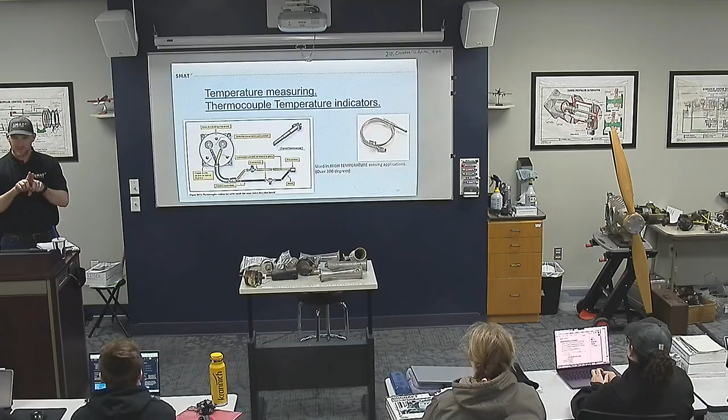Thermocouples. So remember, when we're measuring temperature, there are several different ways to measure temperature on our instruments. One is with a bimetal thermometer, which basically means we have two different metals fused together. One expands at a rate faster than the other and will move an indicator, right? So that's a bimetal thermometer.

A thermocouple has two different types of metal that are fused together at one end of the connection. And if it's a super high temperature, like in turbines, they're going to be super expensive metals, right? So what kind of metals do we use for super high temperatures? Chromel and alumel.

Chrome. Her favorite color is chrome. Anybody know that Trace Adkins song? Yeah, that's a good song.

So chromel's expensive, and alumel. If it's not a super high temperature, then it would be constantan with either iron or copper. So you will have constantan, then iron or copper. So quick review: you don't cut those wires shorter. Now, we've moved up in the world and figured out how to make adjustments and stuff. But when they wrote the FAA textbooks, for the most part, you would never cut the wire shorter.

If you had extra wire, you'd just spool it up and secure it, because that wire that's coming back is usually going to be copper or constantan. The resistance of them is very, very important. We're not making much voltage. We're talking millivolts. So if we're only making millivolts and then we send it through wires, if we change the resistance of that wire at all, the indication for how much voltage is actually reaching the gauge

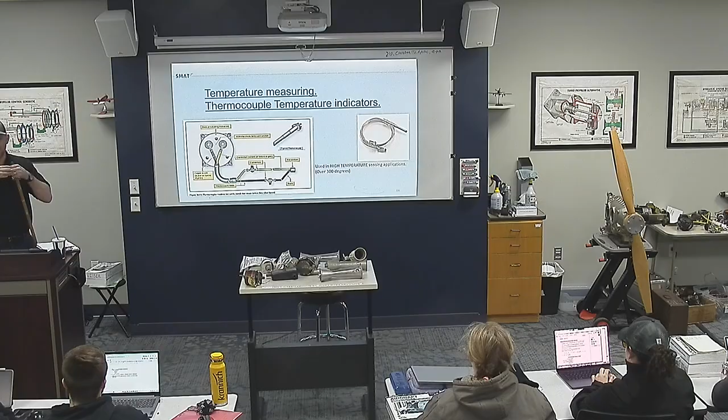The reason it's a crazy heavy duty connection is to make sure that there's basically 0 ohms resistance there, right? If you just had a stake-on connection or a Molex, how many ohms of resistance are there? Well, maybe 3 milliohms. With thermocouples, we want pretty much no resistance, so we'll bolt the wires together to make sure there's no resistance there.

You catch that flash too? Yeah. Weird.

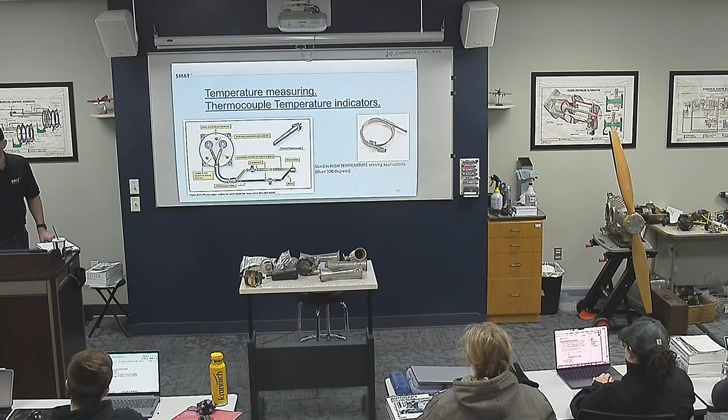All right. So that's thermocouples. Just wanted to touch on them a little bit. We'll get into them deeper in power plant. When we get to turbine engines, we'll talk about how we can put a bunch of them in parallel. We covered this Monday, but quick review: they're going to average that voltage. It'll often go through that amplifier before it goes to your gauge.

But we'll deal with that much more in power plant. But there might be a question on the exam about cutting the wire going through the thermocouple. Don't do it, right? Questions, comments? Is that basically making sense for everybody? Okay.

Okay, got that taken care of. My son, and I actually corrected this slide because he's doing a lot better about it, but when you gave him a job, he was getting really good at not quite finishing. Have you all heard the statement, practice makes perfect? Somebody tweaked it for me: practice makes permanent. Because if you practice something wrong, like when I was in basketball, I always used to shoot from over here, and I practiced a lot. It didn't make me perfect, but now I have a really hard time shooting up here like you're supposed to. I still shoot from my ear. So practice makes

There is a proverb that says, even a child is known by his actions, whether his conduct is good and right. Even a child is known by it. So you guys are building yourselves a reputation. Make sure you're building a good one.

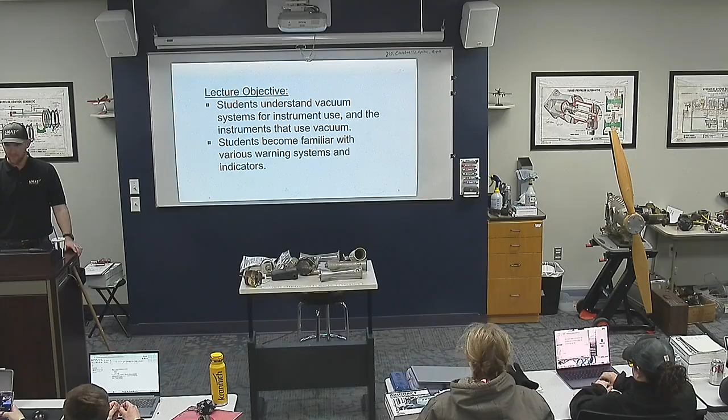All right, we're going to do a little bit with vacuum systems today, and that's where the Venturis come in. And then we're going to shift over to warning systems for instruments. I could do this one for a month, warning systems. It's so fun. Basically, when you go up into a new aircraft that you're flying, probably 30% of what you're learning is the new warning systems, how to read them and how to react when they go off. So we're going to cover it in half a lecture today. Way more info there, but we're just going to cover a couple of them so you're vaguely familiar with them.

Oh, yeah. I gotta find a new seat. Vacuum, you might have to.

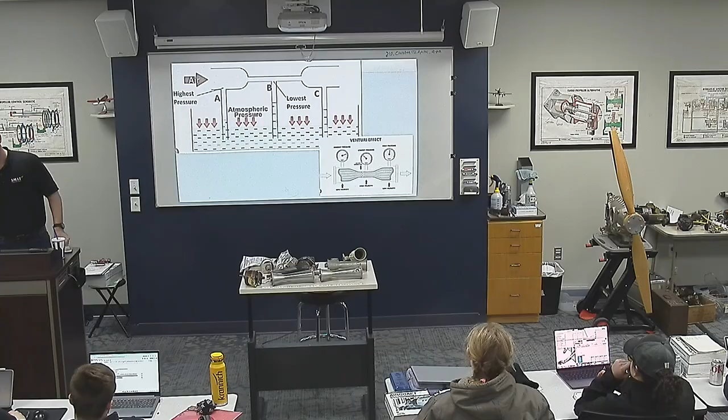So they basically said, you know what, we'll just use the cockpit of the aircraft as our environment, as our high pressure. So the cockpit of the aircraft is our high pressure, it's our environment. It's pretty much the same as static, right? In a perfect world it's a little bit lower, but they're saying the cockpit of the aircraft is the high pressure, so the air is going to get pushed from the cockpit, through a filter, through an instrument, back out into the lowest pressure point, so the air gets sucked into the Venturi, out into the airstream of the airplane.

Randall's asking, I'm just wondering, in some cases, is the static port just used for the environment? No, because our static port, what's the definition of static? We don't have air moving. If we started introducing moving air and changing pressures, our altimeters are not going to like that at all. So we're going to keep our vacuum system separate from our static system.

Actually, a great question, because I just tweaked your exam, trying to confuse you with a very similar one. I took a part that was confusing and made it totally false for people that aren't paying attention in class on Monday. So great question, Randall. Did I see a hand over here? Yeah, I was just making sure. What did you tweak? Which one? Just trying to cover the base there.

All right, so back to Bernoulli's principle: the air has to accelerate to get through the Venturi. If you want to go really deep, what we did is we changed the pressure, the PSIA, into kinetic energy as it is accelerated, because now it has inertia. It's moving faster. Once it slows back down on the backside here, we reconvert that kinetic energy back into potential energy, which is pressure. So we go from a lower pressure back up to a higher pressure after we slow the air back down. That's instrument class 200, but I'm supposed to teach at the 100 level. But that's why we have the lowest pressure there: the air's been accelerated.

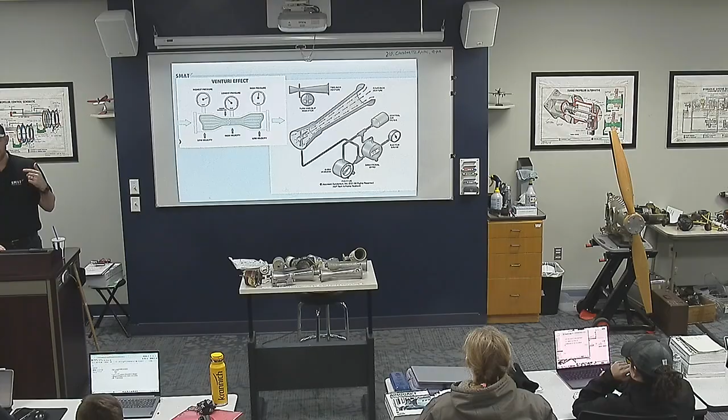All right, so inside our gyros, sorry, not gyros, inside our Venturis, and I'm going to pass a few of these around, one for you. I could've just grabbed all three, I guess. Venturi inside a Venturi. We like to double layer these. They're pretty cool that way.

Some of the images aren't the greatest, but you've got one Venturi, which is the big one on the outside, and you'd say, hey, this is the tightest point of it, right? But what they often do is they put a secondary, oh, I hope I didn't use that word wrong. It's in a slide or two. Yes, secondary Venturi. Secondary is the proper term. The secondary Venturi is that guy right there that is on the inside of it. The tail of it is typically pretty close to the tightest part of the primary Venturi.

So basically what you're doing is you're saying, hey, here's my primary Venturi and this is the lowest pressure, I'm going to give myself another Venturi. If we said, well, what's the lowest pressure in this Venturi? You go, well, we know it's lowest in the neck of it compared to the other pressures. And they're kind of assuming the inlet and the outlet are the same pressure, because that's what people do when they design these things. They are saying this part is the lowest point in our whole system. So that's where the air gets discharged, into the smallest area of the secondary Venturi, right?

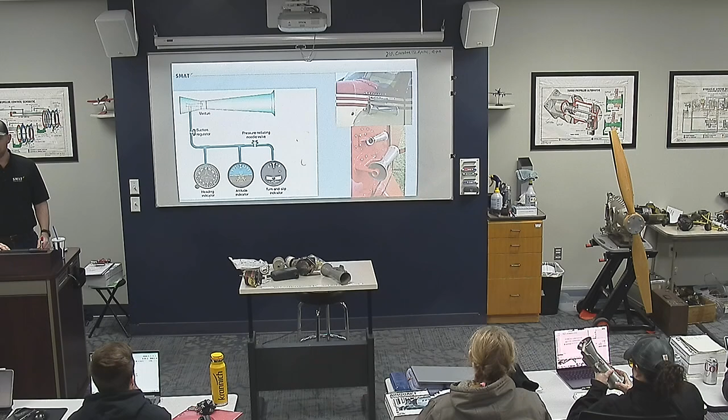So what that does for us is it's kind of like a Venturi inside a Venturi. It works pretty cool. Gives us a good low pressure. They make these things in various different sizes. What's kind of interesting, mathematically, is if you have a 2-inch diameter Venturi, is that what these are? These might be hard to tell. I think that's a 4-inch. They make them smaller, a little 2-inch one. A 2-inch one will typically give you 2 inches of mercury vacuum at flight speed, which is kind of cool.

So some of our instruments, like our turn and slip indicator, only need 2 inches. It's only a one hinge, if you will, gyro. They don't use much pressure. So you can run the old turn and slips off 2 inches with a small one. Some of our bigger gyros, picture our attitude indicators, especially old ones, are bigger, move more ways, and take more suction to run. Both the attitude indicator and heading indicator are bigger, heavier duty gyros. Those are going to require typically 4 inches or so.

So if you make a 4-inch Venturi, you get about 4 inches of suction. That's kind of cool. It starts to break down after that. A 6-inch one, I think you get about 6, but an 8-inch one, you get about 6. You just get a higher volume. Plus, at 100 miles an hour, that's a lot of drag. So on the one hand, you're going, I got free pressure difference, and I'm like, that is not free. That's a lot of drag on the aircraft, especially at high speed, which is why we eventually go away from them. But most of them only have one tube, like we talked about. We want the lowest pressure possible.

You can stumble across some of them that have 2 connections to hook them up. I almost want to say where the pipes are, but I don't want to lie to you. One goes into the Venturi, and the other one is just grabbing the ram air. Not that one. So, for what it's worth, what's weird is they give us this picture in the FAA textbook. I've got one Venturi creating probably 4 or 5 inches of vacuum, so it'll run these without a problem. And basically, they've got a needle valve. Notice it doesn't say a regulator or a relief valve.

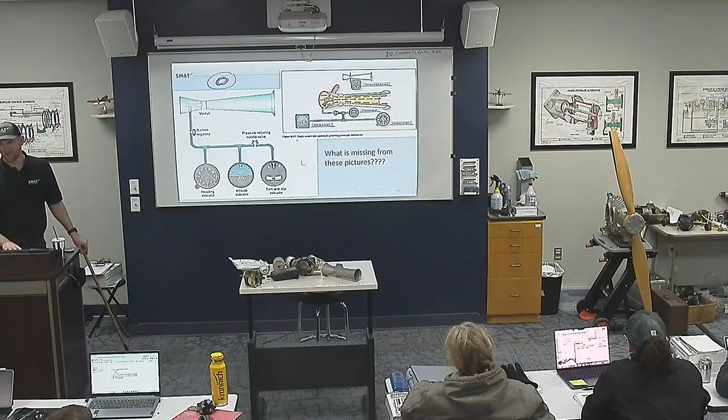Thank you, Amanda. Were you gonna say filtered? I could tell. She was filtering her answer. She's like, I should raise my hand. But I didn't ask for a hand raise, so good job.

Yeah, filter. Any of these are gonna have a filter. So if we were gonna draw a filter in, it looks like that, and then we're gonna come to each of them from our filter. Everybody following? We wouldn't wanna suck dirty air into our instruments. Small picture, bunch of different style filters.

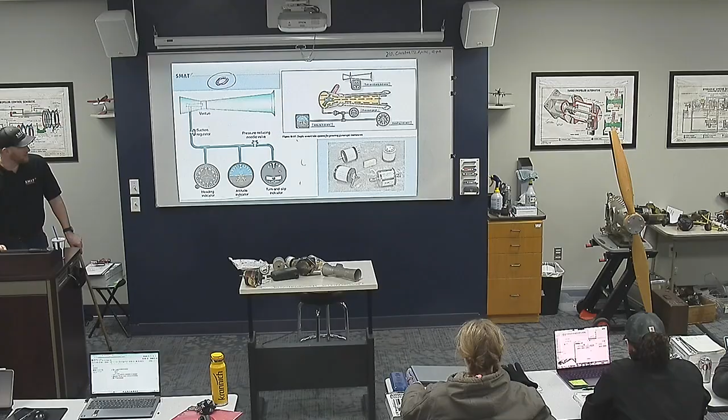Is it Grandpa that doesn't have a filter? I think it's Grandpa. So it has the bottom plate that a filter would get bolted on, but the filter is missing. So if you're following hoses in the 172, you're gonna eventually get to a bracket like this with a fitting, but the filter itself is not on there.

Any filter is gonna have a way to usually replace it. A lot of times if we're filtering air, you're not gonna clean it out. Sometimes you can clean it, but especially with engine air filters, they put a bunch of oil on there so the dirt particles stick to it, and then it's almost impossible to clean. So the 172 just has a thing like this hanging down with a hose off it. The filter is gone, but super easy to replace. Whether it's an annual item or an as-needed item, they're pretty easy to replace. So we're not gonna talk a whole lot about filters. Dirt comes in one side and doesn't go out the other.

Okay. There's a complete picture with an air filter. That one kind of looks like my engine air filter, but it's not. Different air filter.

Alright, if we had a vacuum pump, we got rid of our Venturi. Only crazy people would fly with a Venturi, right? We're leaving Venturis behind because we want our gyros to work while we're sitting on the taxiway, getting ready to take off through the clouds. So now we have a vacuum pump. Some of the early vacuum pumps were lubricated with oil. We talked about that when we talked about pumps.

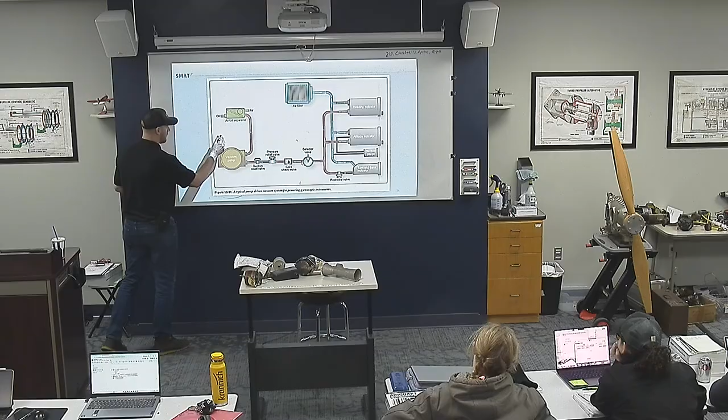So they would put a little bit of engine oil into this vacuum pump. If we're putting a little bit in, it might mist a little bit out. So that oil coming out of the vacuum pump is gonna go into an oil separator. That's what this thing is, right there. We'll pass it around. So the air comes in with oil in it, it'll have stuff on the inside, the oil will settle to the bottom, and there'll be a tube that usually just goes back into the engine crank.

Because coming out of the vacuum pump, that's basically pressurized slightly, right? Your vacuum pump's like, I'm pushing air. So it'll push the pressurized oil back into the engine. Now, it's not like we have to say we're never going to put any air through this line. No, we don't really care. As long as you're dumping it into the crankcase, mostly oil, but if the oil level gets low, we push a little bit of air into the crankcase. Who cares, right? Don't care about the crankcase.

What we want to make sure of, though, is that the vast amount of cubic foot per minute is going to be coming out our air one, right? That'll work. The vast amount of cubic foot per minute is coming out the air, and that's got to go somewhere. Now, if this is an oil system, are we going to put that in our de-icing boots? No, we wouldn't want to, right? Even after an oil separator, we'd be like, yeah, I'm not risking it. I'm not going to get oil in my de-icing boots. But whether it's oil or not, typically we're just going to dump this in the engine compartment.

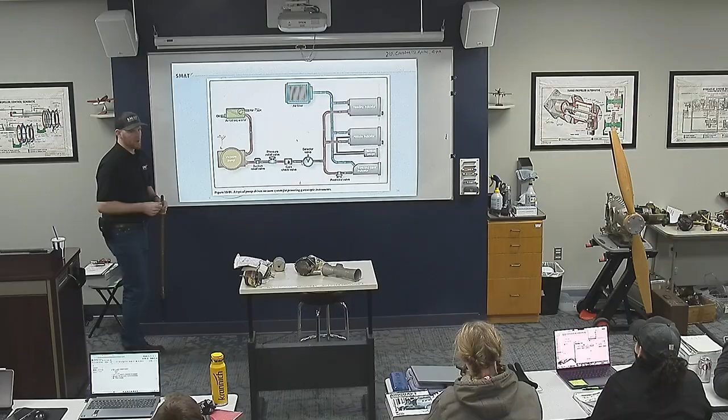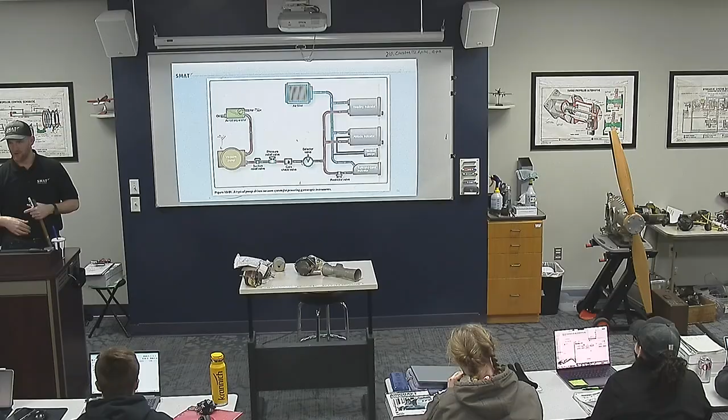Now, our engine compartment, you'll learn later, has baffles, and if you're above the cylinders, it's a little bit higher pressure because the air has to get forced down across the cylinders to cool them. Down below the cylinders is usually a little bit lower pressure, and it's actually kind of getting drawn out or sucked out. So the most common place to dump that air from your vacuum pump is going to be under the cylinders. We'll draw one: with a propeller, you've got your engine here, and then there's an air baffle plate. So the air is going to come in and go down across the engine and out. Everybody tracking with me? So they will dump the vacuum pressure anywhere in one of these areas. It's the low pressure side.

Now, Prepware might like to use the word slipstream. If we were going to look in a 172, the sheet metal from the main cowl to the back is not airtight, and the hot air that you just warmed up because it went across the engine is going to go down and leak out the bottom. So we're basically taking our air coming out of our oil separator, just dumping it in that engine compartment, and it goes out into the slipstream. So whether you say it goes into the engine compartment or into the slipstream, same thing. Making sense? Okay, good.

I would recommend making sure you have this picture, that you could draw it up. Like, I've got a filter, then my instruments, then my pressure relief valve, then my vacuum pump, then I may or may not have an oil separator, and then it's going to go somewhere else. Because if I said, tell me where the air goes, and you start off with, well, it starts in the slipstream and then goes through the oil separator, through the vacuum pump, out to my instruments, you're thinking about things backwards, and you will get that 5-point question wrong on the exam.

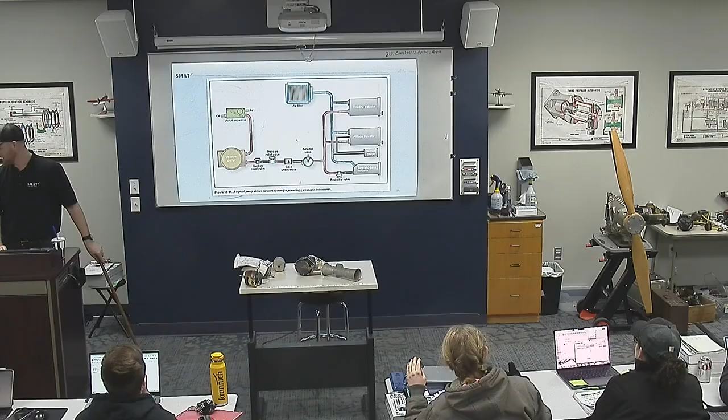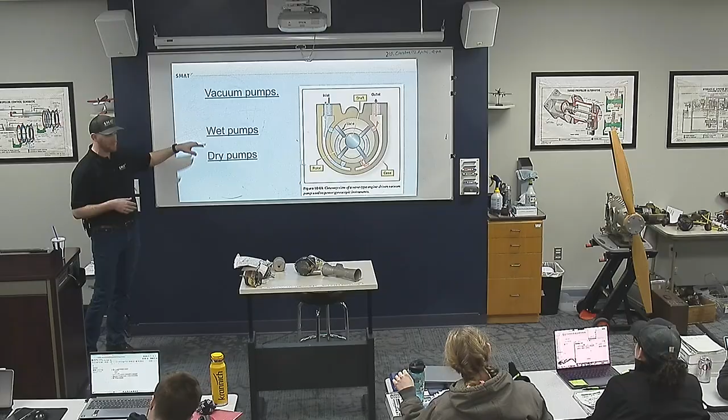All right, vacuum pumps. We've got wet pumps, we've got dry pumps. Most of you, in our pump class, took apart vacuum pumps, right? They weren't actually hydraulic pumps when we did a vane pump. So you guys are fairly familiar with vane pumps. Air's coming in, it gets trapped in an area. That area gets bigger, then it gets smaller, and it has to go somewhere. Some of them are oil lubricated, that'd be a wet pump. Some of them are dry, there's no oil that lubricates them. They usually have a carbon or graphite vane that slowly wears out over time. Talked about that already. Here's an old picture with the same kind of thing.

I was supposed to cover, if you were grabbing on the prop and you're turning it backwards because you're working on the aircraft, you're gonna turn this vacuum pump backwards, right? Which means you could theoretically pressurize up your instruments, which they're never gonna wanna see pressure coming backwards. So some of these systems will have a check valve to keep us from pressurizing our instruments up. In a really rare situation, if you had a kickback on startup or something go wrong with our pressures, you could pressurize up. But that's the only reason there's a check valve, it basically keeps anything from our engine side from ever accidentally reverse pressurizing our gyros or instruments.

Not necessarily needed. Selector cock is just saying, hey, if I had 2 engines with 2 vacuum pumps, which one am I running? And this one is interesting. Suction relief valve. Wouldn't our pressure relief make it, if the suction gets too high, to not happen? Well, what if I am turning the engine backwards, trying to pressurize this up, but this check valve closes? Ooh, I don't want to over-pressurize my suction system.

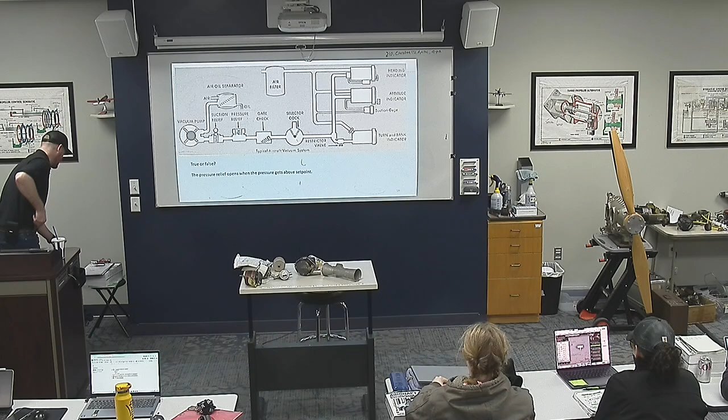But I do believe, and actually I'm gonna double check my notes to make sure, because I just looked at the exam today. But if you got that, if it's a pressure relief, it would probably be true. If it's a suction relief, it would be false. So I would put it in your head that way and hope we're right. Pressure relief, true. Suction relief, false. And I'm gonna check the exam. But yeah, it's a tricky question.

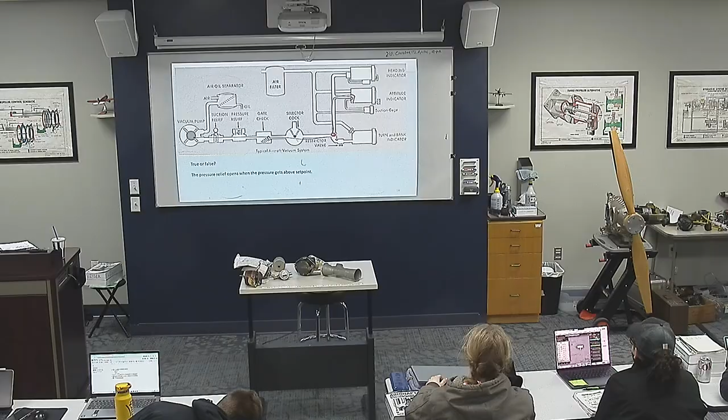Grant? Is there a reason the suction gauge is connected to the attitude indicator? So our suction from our vacuum pump is gonna be the same pressure all the way back to here, right? So, where am I at? This, you can assume, is the same pressure inside that. It's giving you 2 ports. Some of our instruments, you'll see that on the back of the attitude indicator, you have 3 ports on them. Let's see if I can find one. Here we go. Some of them will have 3 ports on them. I know I passed around one the other day that had it.

There we go. I've got an air inlet, and one of them will be an air outlet, and one of them will just be connected basically to the same pressure point. So this and this are the same pressure point. So, good question. It is a little tricky on that drawing, isn't it? Mr. Dino's saying that it had the 2 for accuracy, because if it only had 1, if something happened, there'd be no indication that suction was bad. Yeah, so your suction gauge always has to read 2 pressures.

Our knee-jerk reaction would be, I just need the vacuum pump compared to my cabin, right? But if my air filter were to get plugged up, and we were checking the suction compared to the cabin, I might show a good suction to the cabin, but if my air filter's plugged up, I might not have any pressure difference in and out of my actual instrument. So the reason there's 2 hoses is we want to look very specifically at what's coming into the instrument and what's going out of the instrument. That's what our suction gauge reads. So it doesn't read cabin pressure, it reads the pressure the instruments are seeing, which is after the air filter.

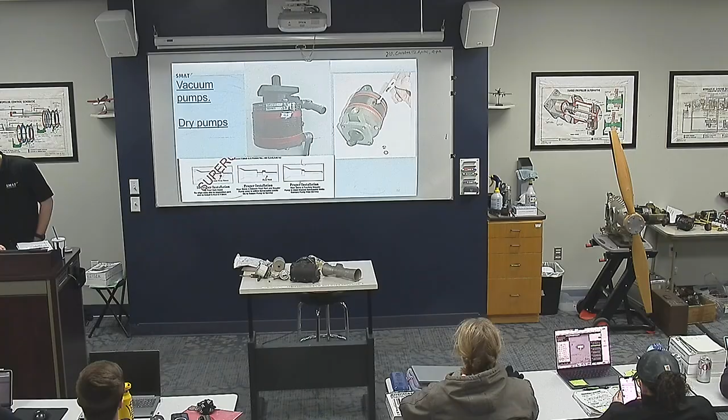So this is only one brand of vacuum pump. It became the most popular. Wonder why, huh? Pretty smart. I can actually check when it's bad. It's a little tool that, if you have a Rapco, you can say, hey, is my vacuum pump getting close to where I should replace this thing or not? Did I see a hand?

Where does the vacuum pump discharge again? Either in the engine compartment or into the slipstream, depending on how you look at it. Okay. The air in the engine compartment will eventually be in the slipstream. Right. It just needs to leave somewhere. Yeah, exactly. Thank you.

And the oil is just circulating from the sump through the pump back to the sump. From the oil in the engine, probably the high pressure oil, to my vacuum pump, metered a really small amount, and then out through the oil separator back in. And it's enough that it's worth it to save the oil. Yeah, because otherwise after 200 hours of running... Yeah.

Plus if you're dumping it overboard, your airplane's gonna get dirty, it's gonna have an oil mist all on the side of it. You don't want to do that.

Wouldn't you have a lot of concern for icing? Venturi? Yeah, if it's in a cloud. Back to, nobody that's flying IFR is gonna have a Venturi. They're gonna have a vacuum pump.

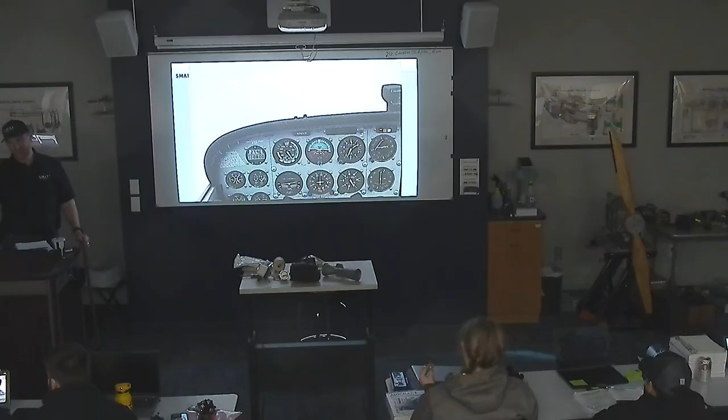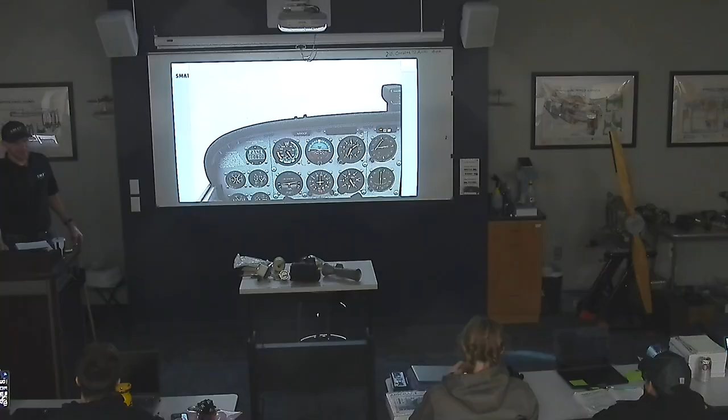Yeah, Randall. If your prop's windmilling, will your alternator actually keep up with all your electrical system? Depends what all means, and it depends on the windmill speed. But yeah, they windmill at 1200 RPM, something like that. So you're going to be right in that gray area. You're probably not going to want to use all your electrical in an emergency, stay on the radio, but it'll make a little power.

All right. Did I even change the slide? I don't think I changed the slide.

So, anyway, I looked it up and I was like, oh, he survived, because I saw a flight they did later, and then I looked at it later and I was like, oh, it was a sim flight. So it turns out the guy wasn't almost dead. Somebody was flying in a simulator and took a screenshot. Fortunately, because I was like, how did we get that picture? That guy should have died. It was a sim flight, but pretty realistic looking sim flight with that instrument panel, isn't it?

Alright. Twin engine planes are usually going to have two independent vacuum systems. One vacuum pump on each engine, and the pilot will have an attitude indicator, turn coordinator, all that stuff. The co-pilot will have his own. So the idea is if one engine stops running, the other engine will power the other pilot's instruments, so at least you don't lose all of them. And that's back to when you said there was that selector valve. Sometimes you got a valve so if one engine dies, you can make both instruments run, but anyway, crisscross.

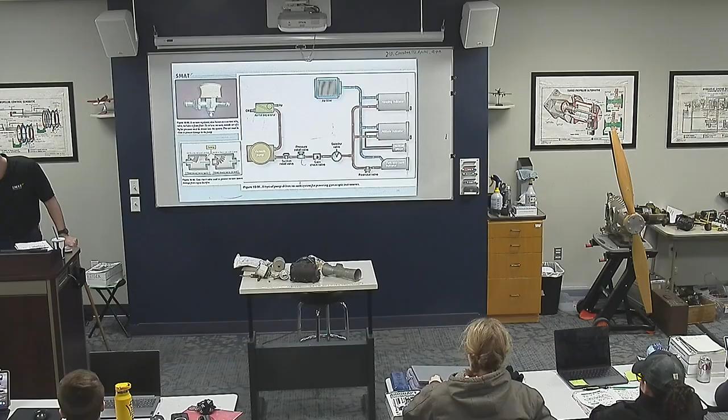And Shane's like, I have no idea what you're talking about, because he just showed up. All right. Alright, I already talked about that stuff.

Next slide to break. Notice, like you guys have been talking about, there is no negative on any of those numbers. So on our suction gauge, it's only positive. We normally measure inches mercury, and pretty much the sweet spot's usually right at that 5.3. But it is measuring a pressure difference between the vacuum pump or venturi and cabin after the air filter, but it is typically a negative is what we would think of the pressure difference being.

Because of that, last thing before the break that you do need to know, if you were to go in an airplane that's using a vacuum pump, so typically reciprocating engine, because once we get into jet aircraft with turbines and all that kind of stuff, most of this vacuum system is like, well, we'll do something else.

If you go really, really high, like the bombers in World War II high, not a pressurized aircraft yet, and your engine's out there in very thin air, it's very hard to get even a 5-inch difference, because let's say you're at like 20,000 feet, we only have like 15 inches PSIA, if you will, or HGA. So it can be very difficult for a vacuum pump system to work when the air is super, super thin.

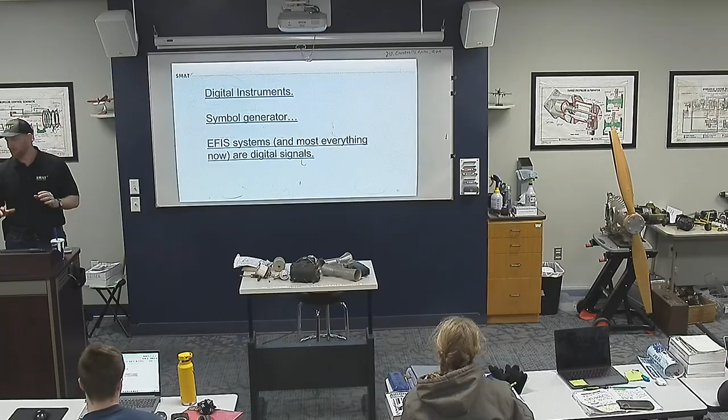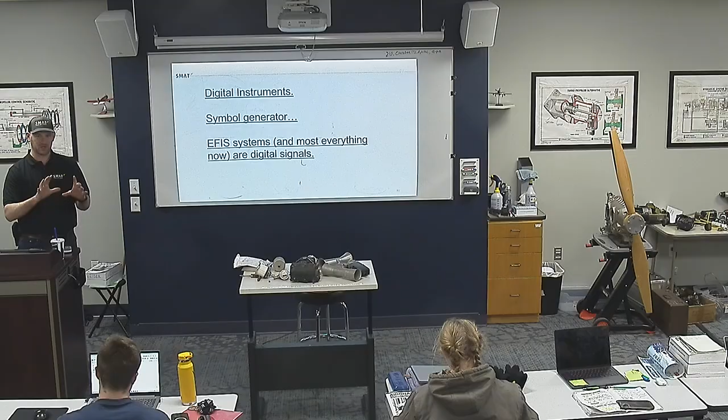Our digital instruments. Way back in the day, they had things like a symbol generator. So think like a black box thing, maybe like GPS-ish or where other airplanes are, and they got to figure out where to put the triangle that's the other airplanes. And it might not have been a digital screen. They might project that onto the screen you're looking at. So they used to call that a symbol generator. It was basically the computer that would project stuff onto the screen.

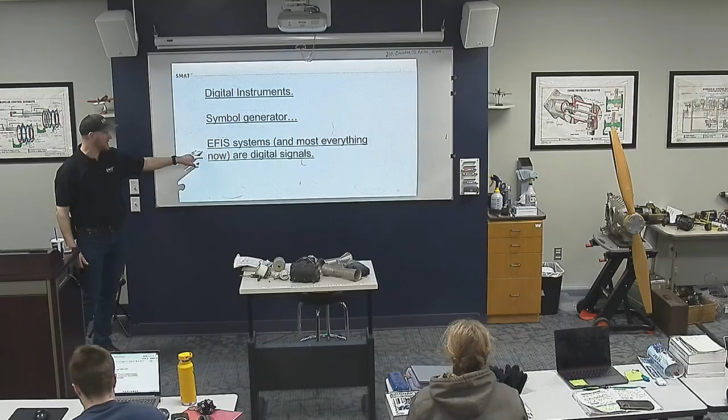I can't think of any instruments that I've seen that use that kind of technology anymore, but some of the Prepware questions still show up. So symbol generator. Nowadays, we're gonna have EFIS, electronic flight instrument system, I think, is what it is. And basically digital. So we go to digital.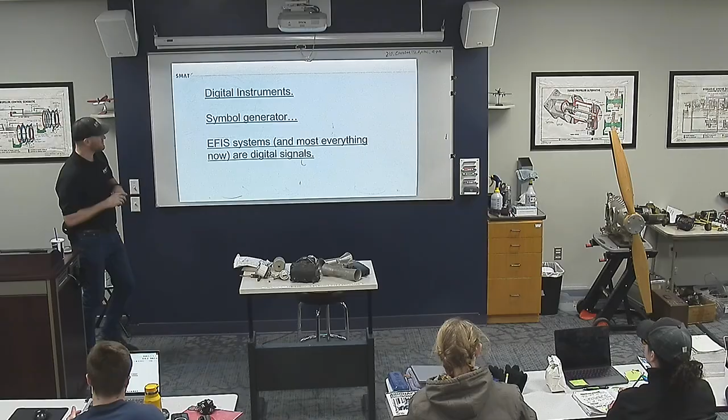You've got an LCD display, liquid crystal display, or LED display. They're going to be a digital signal. So some of the terms we have: a symbol generator was back in the day, like, I've got to put something on their screen. Well, nowadays it's in a computer. You're not really going to see that, but that's what a symbol generator is.

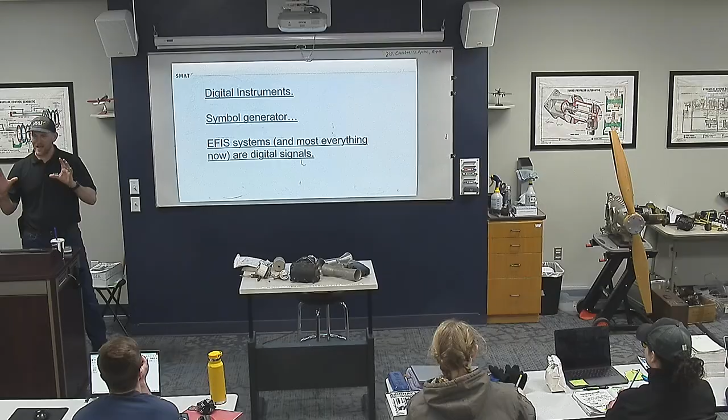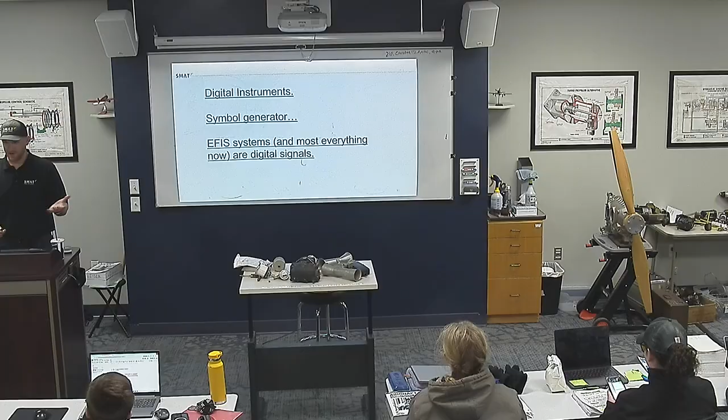And EFIS is, think glass panel, and basically everything gets converted to digital, so it's going to send a digital signal. There is a question where one of the answers they try to give you is a carrier wave signal. They're like, does an EFIS use a digital signal or a carrier wave signal? I'm like, carrier, what is that? So you guys actually know the answer to this one. Does anybody know what a carrier wave is?

Radio. There you go. So remember when we had my guitar up here and I went, pwong, and that pwong wasn't giving any info, it's just our pwong, and we'll adjust our pwong by either changing the frequency slightly, FM, or by changing our amplitude slightly. Well, that's not right, but you get the idea. Most of our aviation is what? AM, right? So the carrier wave is just the pwong that doesn't really give you any information.

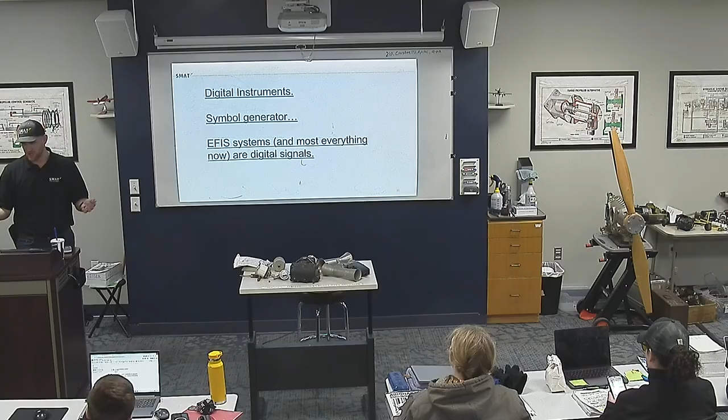So they're trying to throw you for a loop if they say an EFIS uses a carrier wave, because the carrier wave is what your communications radio is, just the baseline it sends out to say, from here we'll change something to put information on it, right? So EFIS, digital signal.

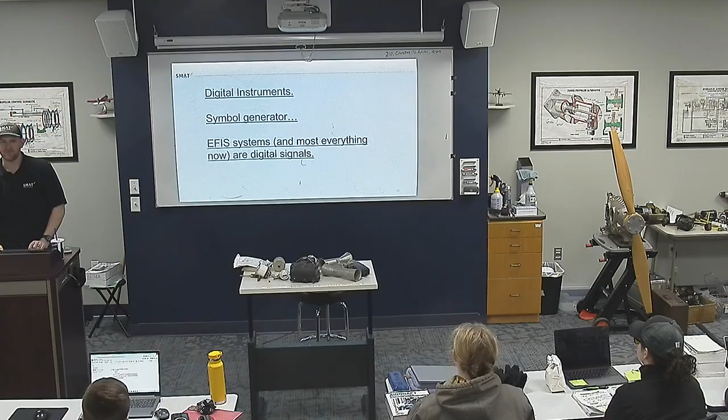What does EFIS stand for? I just said that. Were you out of the room? I think I came in a minute late. You should come on time.

It's in Dale Crane's book. Electronic flight information, I think, system. Yes, glass panel. If the S is system, what's the system? Somebody look it up. I looked it up this morning. Electronic flight instrument systems. So it's one extra S, kind of like our BIT test.

Once you go to a digital panel in front of you, you actually don't even have to look out the window. You could fly off that thing. It's got all your engine monitors on there and co-pilots. Oh man, they're nice stuff. So all that stuff is digital and part of the EFIS.

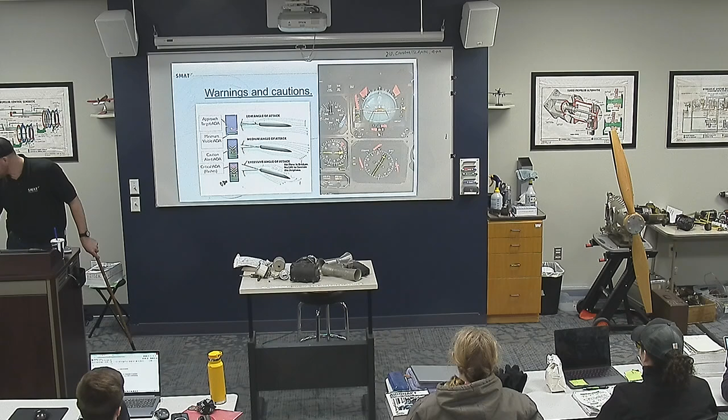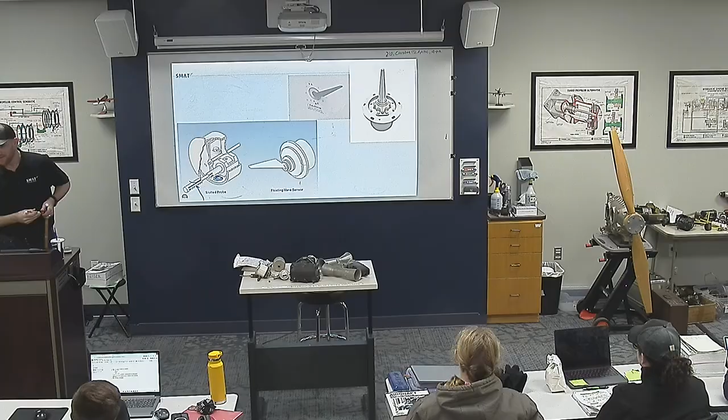So if this pressure chamber were higher than this pressure chamber, it's going to rotate. So it actually rotates the little mast so that it's lined up with the airflow going across the side of it. So when you're walking by the Beechjet next time, go find that thing and just gently turn it, and you'll be like, whoa, it's one of those really expensive high-tech devices that's just fun to turn. Because you're like, there's some engineering here, right? Nice bearings, fun to turn.

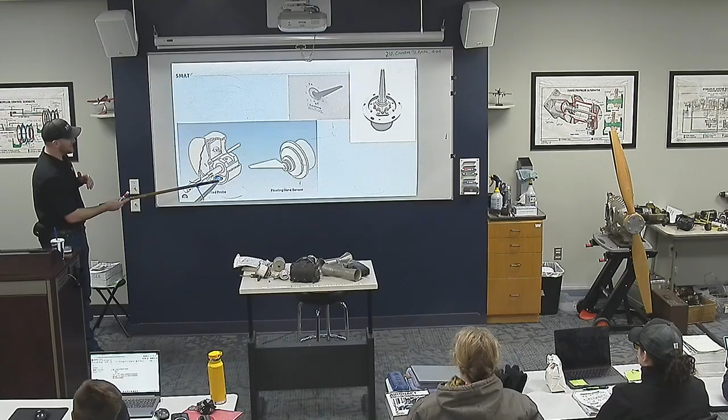So these act exactly the same as what this would, that kind of makes sense, right? It's just a vane out in the wind, and it's gonna align itself with the wind. These slotted probes, they do the exact same thing. It's just the air pressure coming into them gets funneled into one of two compartments on the inside, and that'll turn the inside to line up with the airflow.

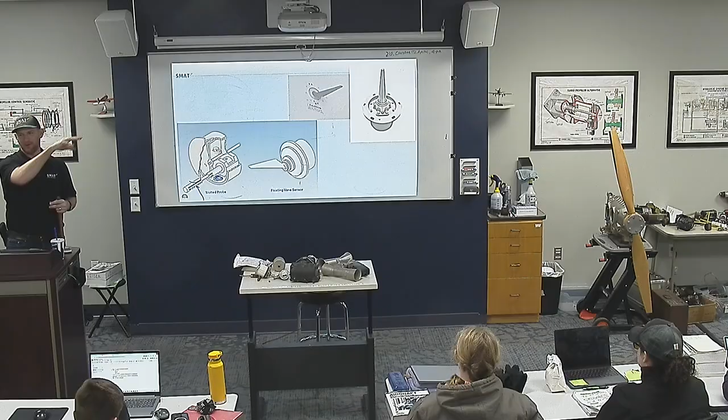So that will turn, and then obviously it would have to be connected to some sort of sensor or system that will relay that information back into the cockpit and or the flight computer to tell you what angle the air is going by the airplane, to tell it, hey, are we gonna stall because my airflow is on this angle compared to the wing, and it can't be that much. So, everybody tracking with me on that one?

Kinda cool. The old school version is what you're gonna see on more of our Cessnas and mission aircraft. There we are. This one's just an electrical switch. I'm trying to remember which way it goes. I think it goes this way. So it's mounted on the front of the wing, and basically the way to think of it is when that switch is down, everything's fine.

We're all happy. If I had this on the wing, if I tip the wing up into the air coming into the wing, the air is then gonna push that switch up, which is gonna set off a horn to say, you got too much of an angle of attack of the wind going to the wing. Now, if the wing's perfectly level, but you're falling out of the sky, the relative airflow still pushes the switch up, right?

So, if you had this on an aircraft, and it's mounted on the front of there, and if your stall warning horn was going off too early, that basically means this is mounted too high on the wing, and it's getting pushed too early, right? So you would have to go in, there's usually a set of screws that hold it in place, and they'll either be slotted on here so you can move this, or it'll be slotted on the aircraft. So basically you can move this up or down the leading edge of the wing to say, hey, when do I want the stall warning horn to go off?

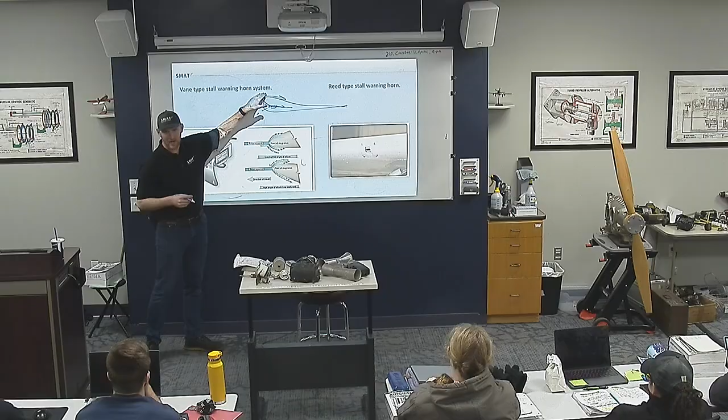If it's going off too late, so the stall warning horn's just not going off, that means it's mounted too low, it's always getting positive pressure, so you've got to move it up the wing. So go look at a wing, you can test them out. Do we even have that many wings? You can test them out there. I might recommend cleaning the wing with alcohol or using a rag, because, well, I already told you how I test them. Questions, comments on those? Okay.

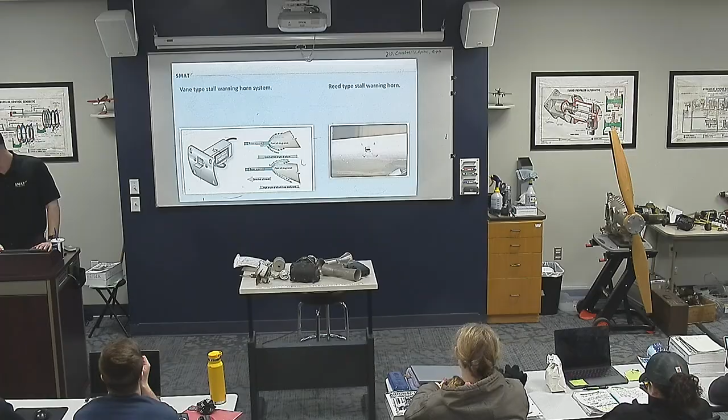The Cirrus SR22 and others just have a pressure switch that's mounted basically on the wing, one of your homework things. And I can't remember, I never worked on a Cirrus, so I can't remember if that pressure switch is up here or up in the front. You guys probably don't even know either. You did all the homework and you don't even know where the pressure switch port is. I did the same homework with you too.

But basically the idea is if it gets low enough pressure, it's going to go off. So I think it's going to be mounted somewhere in the front as well. It's the same idea: if you get in a stalled attitude, it'll be a negative pressure. So I think it's mounted up towards the front section.

But some of you will write on there, I'm going to put the aircraft in a stalled attitude. And I'm not saying you guys, I'm saying last year's students. I said, okay, did you do that in the hangar? And they're like, yeah. So they basically jacked the airplane up, at least that's what they said they did. And I was like, no, you've got to test fly it.

So if you're doing that homework on the SR22, if you didn't test fly the aircraft after you adjusted the stall horn, you did it wrong, right? So I'm going to have to go grade some of yours. Probably some of you are like, oh, that's right, I should have test flown it. So that's your big clue there. You've got to test fly a Cirrus after you adjust the stall horn, because it's basically measuring the pressure trying to escape from the wing. Very similar to a reed type valve, it's just using a pressure switch instead of a horn. You've got to go back to general on the angle of attack. Exactly.

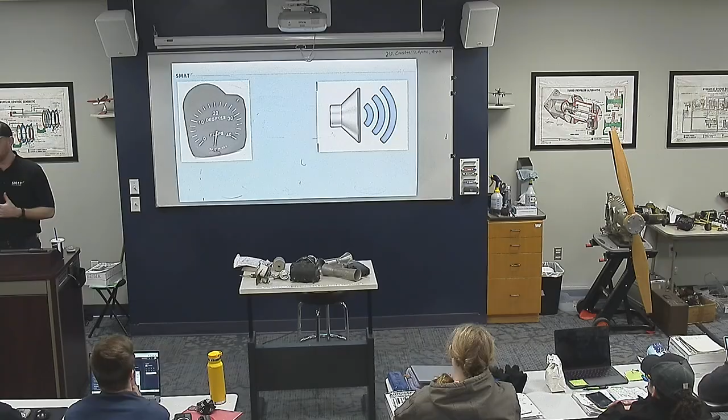What is that a symbol of? Speaker. Sound, speaker, yeah. So basically your stall horn, right? So in instrument class, you might have pressure switches and your engine pressure. You might have any sort of thing that would be considered an instrument, but you can't see it. So we're in this gray area, you're like, I can't see that, is that an instrument? I'm like, yes, but it gives an aural warning. So I've got some slides here for you.

So in a float plane, if you land wheels down, that's why you will flip it. When the wheels hit, there's so much drag. Basically the wheels produce drag, they tip the nose of the aircraft down, and once the front of the floats hit, it's all over. So that will happen every time you land wheels down. So I have some more slides for you.